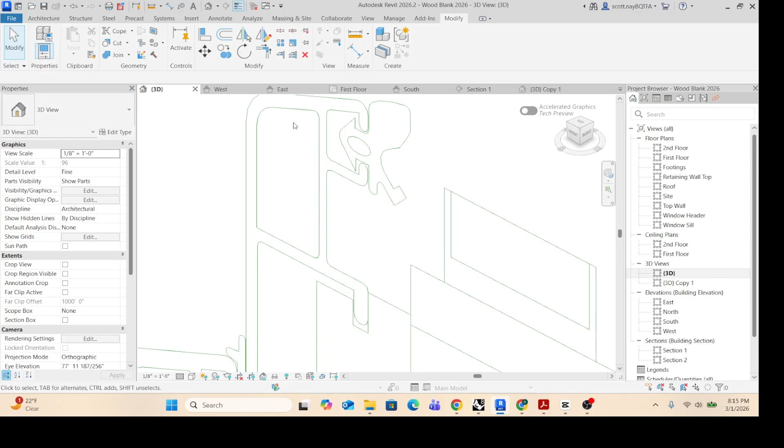So before we get into the actual how-to, this is everything I traced, and I tried to be as accurate as possible to the original, and it was extremely time consuming. I think for the larger objects, like this bit that's wood, and this bit that's wood, well, didn't quite get it all. Definitely doing the trace is something I want to see.

But once you start getting to this stuff with the aluminum, this profile is pretty time consuming, and it only gets worse from there because these objects don't even match the original because there's too many small lines that Revit can't do. So if you want to start simplifying these shapes, that's fine. I'm just showing in the video what you could do if you took the time.

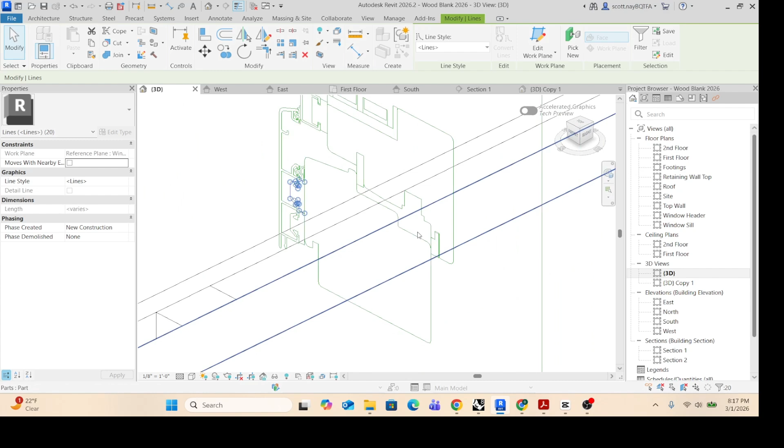And like this one here, it's not highlighting well, but that's one of the little plastic pieces you're going to end up doing. Here's another one. This is already slightly simplified here and here. So make good decisions. I simplified these again because Revit couldn't handle it, and just so you know what I'm talking about now,

I'm trying to trace all this stuff, but these lines in here, way too small. This stuff in here, definitely Revit cannot handle that. So if you want to simplify it and create a different shape that does the same thing, maybe just a little rectangle connected to a larger rectangle, that's totally fine when you get to that part.

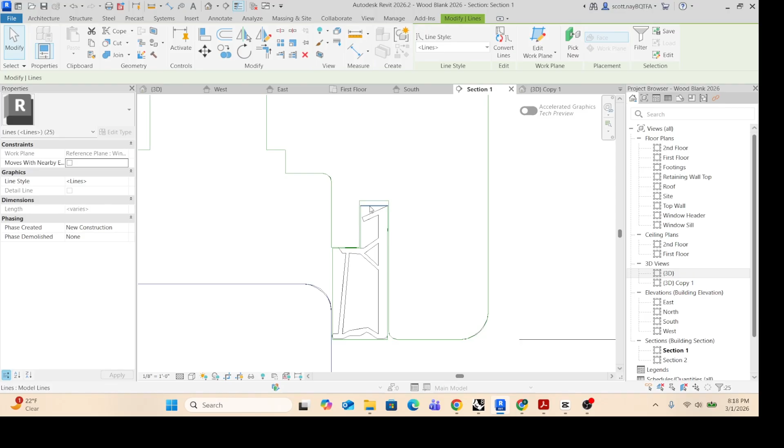Just please make sure for these main wooden elements, like this one, and well, it kind of goes all the way around, but now that I've added stuff, anytime there's double lines, it doesn't know which one you're trying to click. So these two, definitely get as accurate as you can to the drawing. But you can see this very narrow and complicated shape I've turned into this.

So, all right, that's just my disclaimer before we get into the rest of it. And now you can start seeing the actual process. All right, so we're going to try and do a window. This is the one I've downloaded and put on Canvas. It opens two different ways where this window swings in. So this is that version, and then this is just a fixed version of it. They're both on Canvas. So if you look here, there's the fixed window, there's a PDF of it.

And so all this is wood, anything with that texture. All of this with these dots inside, that's some sort of flexible sealant. Probably EPDM roofing is the closest thing we'll have. And then all this diagonal hatching is aluminum. This is our glass. We got some spacers with some more flexible sealant. And you can see on the fixed one at least, this comes underneath and attaches here.

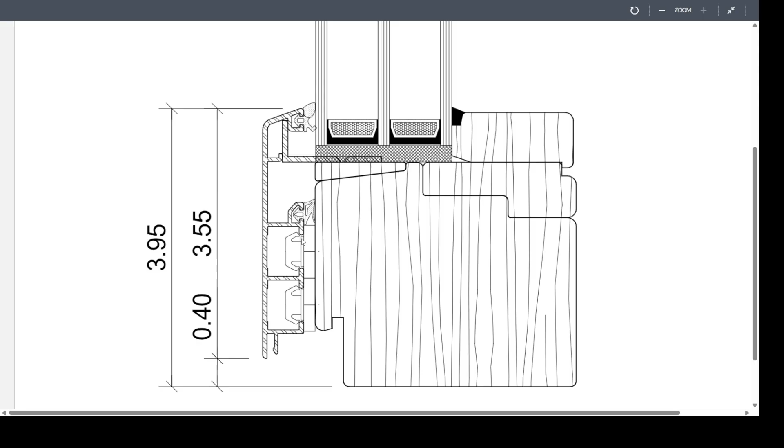These little guys are made out of plastic, and they actually attach, it's this whole thing that goes up against the face of the wood, and they just clip in. So you can see this would squeeze in as you're putting on the aluminum and then pop back out once it's in place. There is a DXF version of it if you want to import that into your Revit file. And then here's the one I'm gonna show because it's got more detail. You choose which one you want to do.

Same hatching though. You get the steel, the diagonal, these dots in here and here, here, those are all some sort of flexible thing, more plastic, wood. So download whichever one you want to do. And even within this, if you choose to end up simplifying certain things, I mean, we're going to have to because of limitations of Revit. Some of these curves and lines are just too small, and Revit won't allow you to draw them. So again, I have the PDF and I have a DXF.

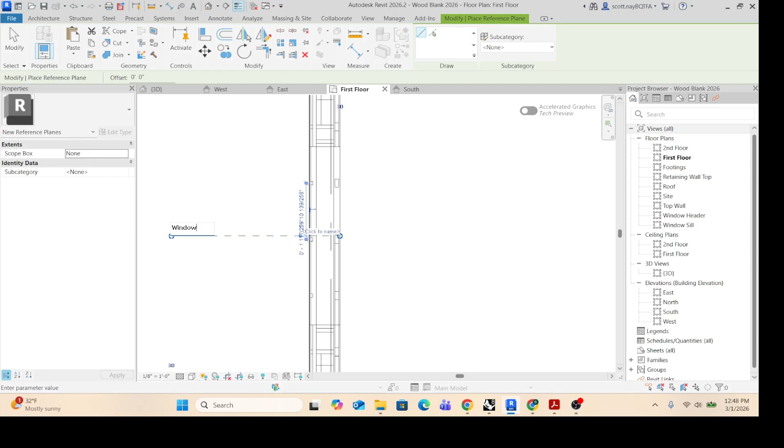So I'm going to come into Revit, and the first thing I'm going to do, I'm going to go to my first floor, and I'm going to make a reference plane. I'm going to find the midpoint of my opening here. So that says my midpoint, and if you look on the bottom left, it says it's my wall. Great. And now I'm going to call it window sweep. And just for fun, I will drag out this so it's away from my other geometry. All right, we have a reference plane to draw from.

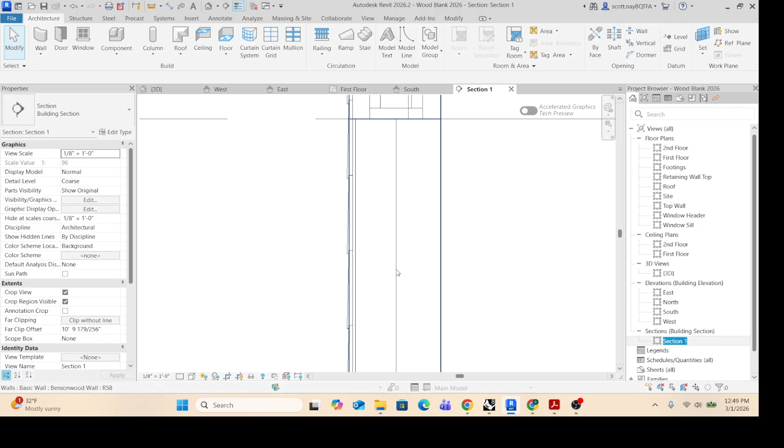Now we need a section cut. So I'm going to come up here to our top ribbon, draw a section. Parallel to that, I'm going to open it up. And so now I'm going to start hiding things I don't want to see. That was just the thing I used to cut my siding with. But, you know, the more we have here, the more crowded it will get as we're creating all these elements. So I'm going to hide that.

What is this? Structural framing. Yeah, there's a lot of structural framing beyond here. So what I might do is just come in here. I don't necessarily want to get that header.

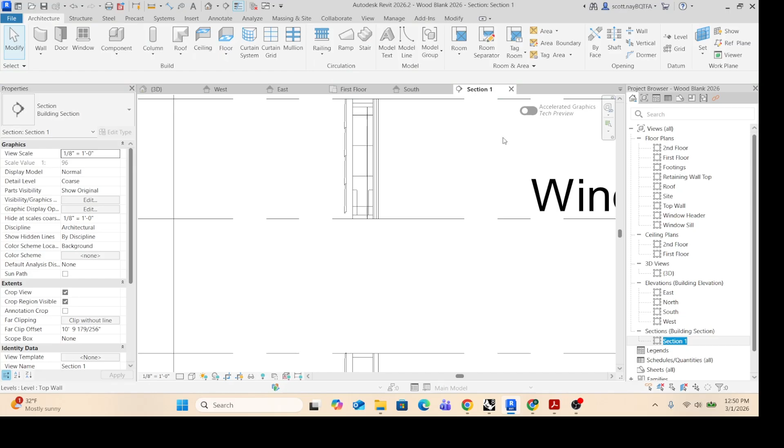All right. I'm going to hide elements and see what's left. Okay, so I still have my sill. I have my header. I'll go ahead and hide these two as well. So now I got a fairly clean view to do my profiles from.

I can come into the Insert tab, and I'm going to import a CAD. So I'm going to use the one with hatches removed because, for me at least, the more noise there is, the harder it is to make decisions. You're probably going to have this thing defaulted to some sort of auto. I'm going to say manual origin. Preserve layers, keep it at inches, and then I'm going to say open.

And here is that DXF. Just going to leave it here for now. And now I'm going to use the move tool. I'm going to get it first down onto the sill, and then I'm going to move it closer because typically your actual window is closer to the exterior. So I'm just going to kind of make a decision where I want that. That's probably a little too far because we're going on our sheathing. All right, I'm happy with that.

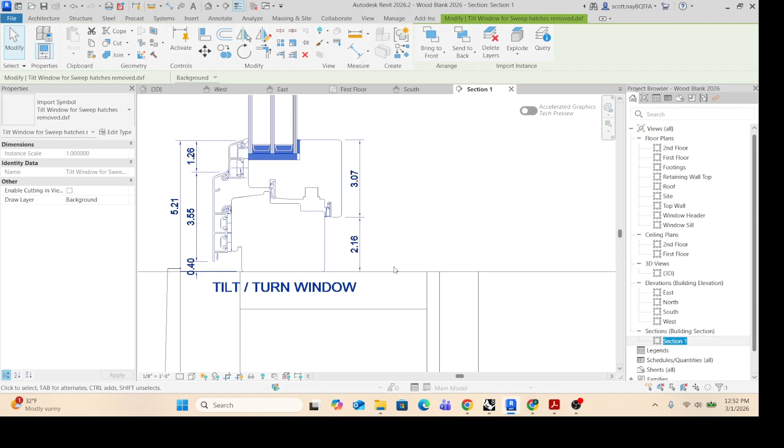And now this isn't going to sit directly on here. There's going to be some more wood underneath. So I'm just going to move it again. Now that I have it where I want it, I'm going to come up 3/4 of an inch, and that'll leave us room for some additional material.

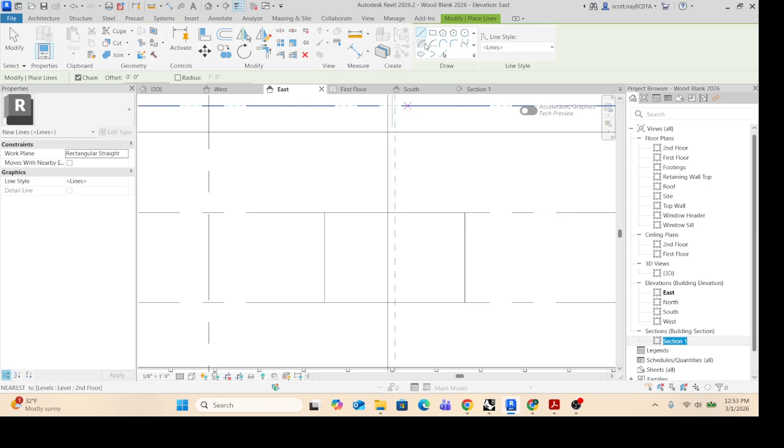All right, almost there. I need to create the boundary for when we're making our sweep. So I'm going to come into my east. I'm going to go to architecture, model line. Well, first let me see what this is. All right, I'm going to hide this. All right. And I'm going to pick my plane. So I'm going to make it the opening. And then I'll just pick the actual lines of the opening.

Great. So 3D view. I want to grab these. Again, I'm going to hit tab to get the whole chain. And my brain works better when this is a little further away. So I'm going to come back into my first floor view. I'm going to say move. And I'm just going to move them. Oh, let me unconstrain it here. I'm just going to move them like 5 feet away maybe. I don't know. Let's see what 3 feet away looks like. 5 might be overly aggressive.

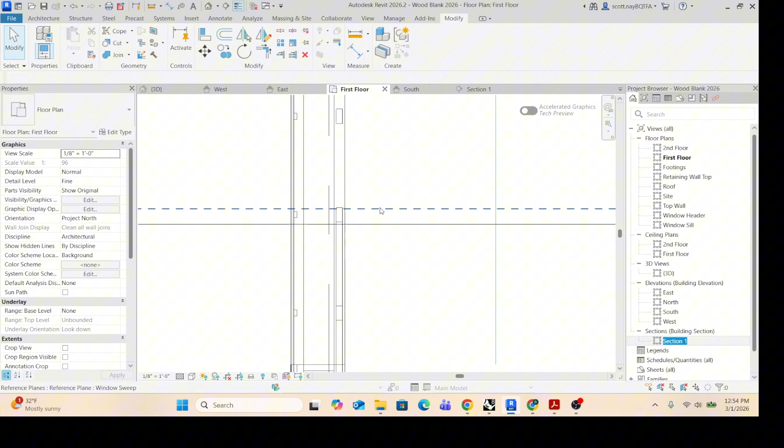Alright, so now I have something. And if I change this just a little bit, now I'll be able to choose my sweep without it being up against all my other geometry and accidentally picking the wrong thing. So I have all the important elements. I have a reference plane that I have named, really important, a section that looks at that, and then I have my model lines that follow the opening of my window that you can see here. So I'm going to go back to section 1 where I've got our outline.

The process is going to be pretty repetitive. But the good news is, as long as the elements don't touch each other and they're the same material, you can do the sweep at once. So this wood and this wood, I can do those both at once because there's no overlapping lines or touching lines. If you take the time to separate this out as EPDM and this is aluminum and this is aluminum, you can do the 2 aluminum pieces at the same time. And then you could do 1, 2, 3, 4, 5 pieces of EPDM all at once because none of them touch each other. All these plastic pieces you could do at once. And we'll get to this in a bit.

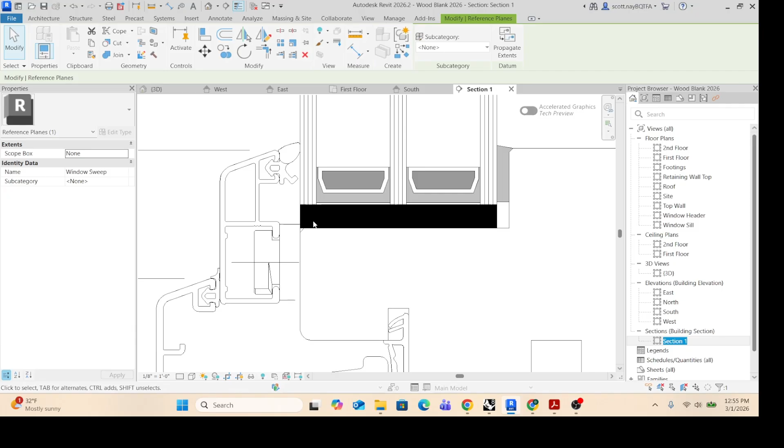If you look at the actual pictures, this is far more complex than we're going to be able to put together in Revit. So one of the downsides of Revit, or the limitations I should say, is you cannot draw a line less than 1/32 of an inch. And I have tried multiple suggestions on how to fix that, changing scale, drawing it large and scaling it down. And the only one I haven't tried yet is creating a custom family because that's kind of beyond what this class is about. So I'm going to start with the wood ones because they're the largest and the easiest.

I'm going to go to architecture, model line. I'm going to set my reference to the window sweep. I'm going to start just by using pick line and getting all the major ones.

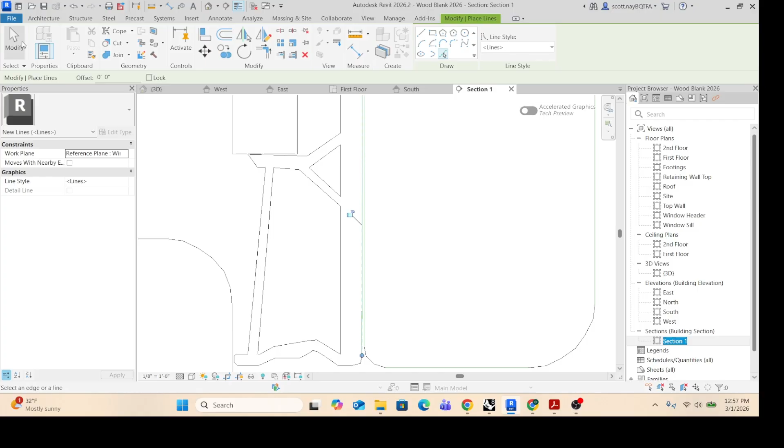Okay, let me undo that. I grabbed the wrong one on accident. So if I click that, no, okay. So be careful which one you're picking. Alright, so now I'm back to that. I don't need to, it's still on the correct reference plane. So even if you have to edit something, don't worry about it. It's a pretty easy fix.

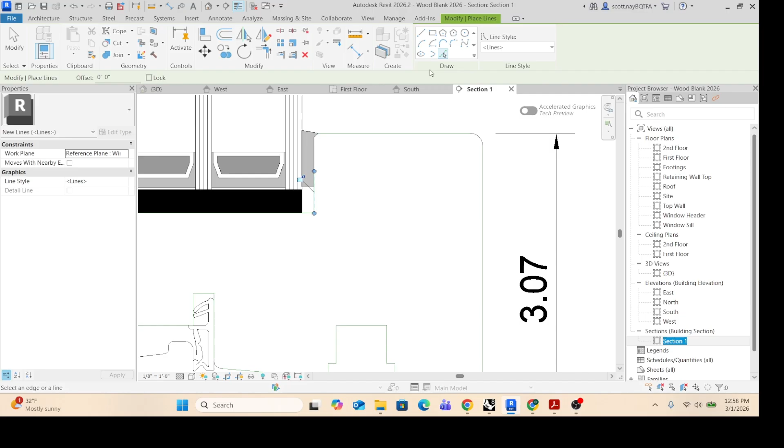And I'm going to come back after I've got all these straight lines and do my curves. And this one's not the one I want, so I can either come up here or I can click tab. Alright, now I'm going to switch to fillet, and even with this one that's super short, it'll still work. And I'm just eyeballing based on the drawing here. I'm not going to be typing anything in like we did with that zinc roof, because each curve is a little bit unique.

So that's a straight. Here we got another curve. And you can see if it gets too small, it's just like drawing a line less than 1/32 of an inch. It will let you know. And so now we got this one. And I don't think these are actually connected. I think I've got all my other curves, so I'm just going to use trim because I don't think they actually did.

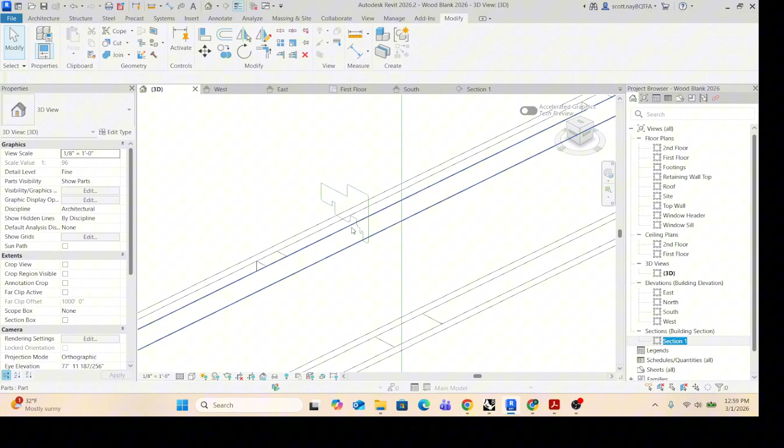Alright, and so now if I want to see, did I get this all, rather than hiding my image, if I just come to 3D, I can see, yeah, I've got a complete, and I'll know it's complete because if I hover over one and click tab, it'll give me the whole chain. All right, that's one profile down. I'm not going to bother doing the sweep yet because, like I said, as long as it's the same material and they're not touching, you can do them all at once.

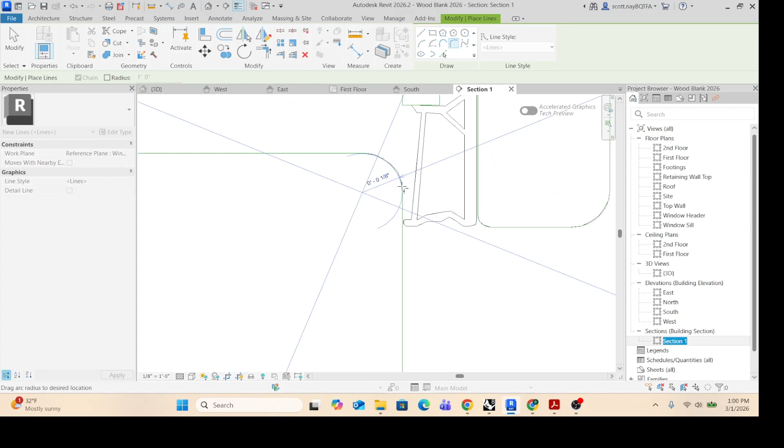So I'm going to come back in here, go back to architecture, model line, same process. I'm just going to pick all of the verticals and horizontals to start, and I'll deal with fillets after the fact. This one's a lot more basic. So there is a lot of tedium in this.

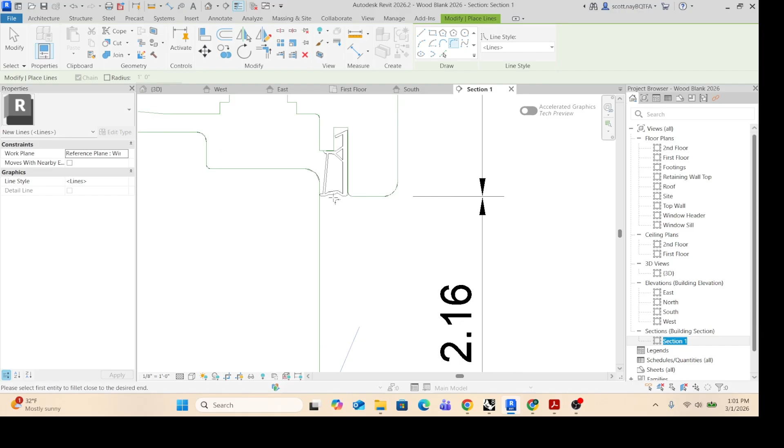Okay, I'm pretty sure I got all that, but again, I'm going to come to my 3D and let that be my deciding factor rather than hiding and unhiding. And then I'll click tab. Yep, okay, I have two successful sweeps, or sweep profiles, I should say. And so now, since I drew these on the bottom, the first path I want to pick is this one when I do our sweep.

So I'm going to come into architecture, component, model in place. This is going to be window. This is going to be a sweep. I'm going to pick the path. I'm going to start down here. I'm going to say OK. Now I'm going to edit the profile.

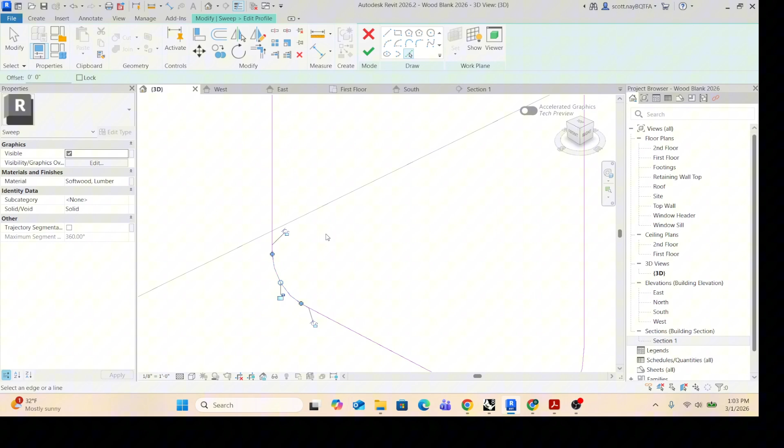I'm going to say pick lines. I'm going to do the tab. Tab. Oh. And you don't actually have to hold shift when you're doing it. Oh, what's it stuck on now? Unfortunately, I didn't grab these first go around, and if I tried doing the whole thing again, it would give me error messages, so I have to go one by one. All right, so I've got both of them.

Great, this is already softwood lumber, so I don't need to change my material yet. I'm going to click OK that I'm done. I'm going to click OK, and now we have our window. And if I come here, this is what it looks like. If you want to use a different wood, you can see on the manufacturer's website that pine is one of the options, but they do use other woods. Totally up to you. All right, so I've got that. Let's come back into our section cut.

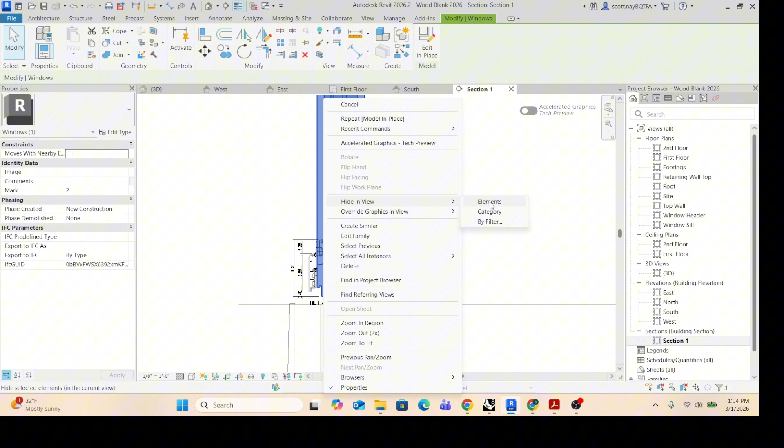And so now I got all this. I'm just gonna hide that for now, because again, I want to be able to see cleanly. So what am I going to do next? I'm going to do some of these aluminum ones. And this type of detail is absolutely not going to work in Revit. These connections are too small.

I'll just show you what happens if I go model, pick line, and I pick one of these little ones. You see it says can't create line. I've even tried doing this at a much larger scale and then scaling it down, and all it does is delete all these tiny little lines and you have to recreate them. So I'm going to use pick line. I'm going to pick my significant ones that I know are going to work, and then make some executive decisions as to how I want to connect those.

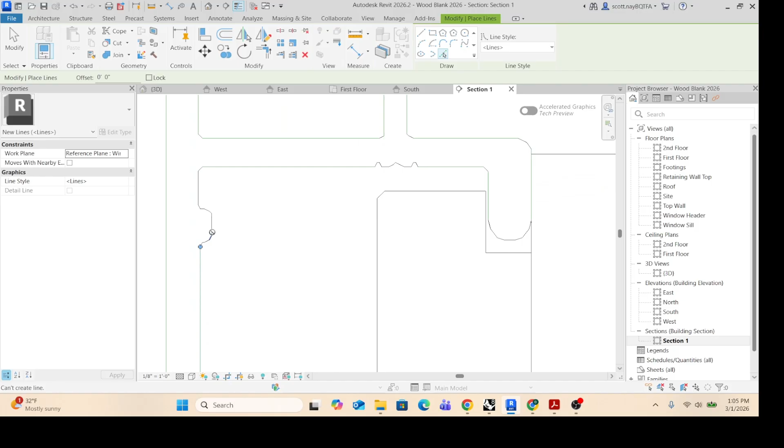And even this, you can see it won't do it. So I'm going to leave these out because even if I did this in a diagonal, it wouldn't be happy. So there's a reason most manufacturers have these as a separate drawing from their actual Revit components, because they know Revit can't handle this.

All right, I am gonna make some decisions here. I'm gonna start in this view and just go with some fillets because I know I can do that. And once I get, yeah, there we go, I can get that much at least. And I don't know that this is going to let me do it. We'll see. Yeah, as soon as I get there, it stops.

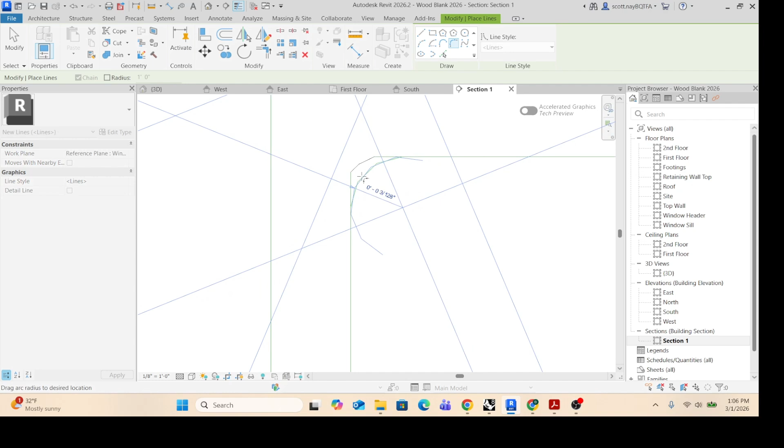So if you just want to connect these using trim, that is a choice. I'm going to try and get this as close as I can. So for this, I'll finish with my fillets first. And even though these are really far away, I can still use fillet. And it looks like 256 is what it's letting me do for a lot of these.

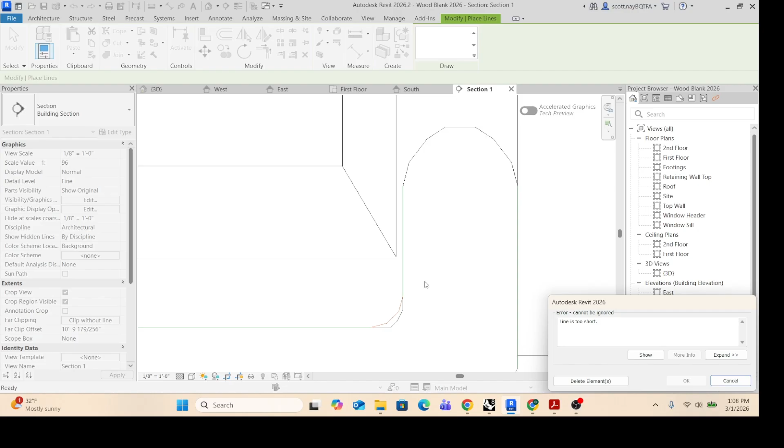But not this one. So same arc, but you can see line is too short. I'm going to have to say model line again, fillet. So now technically it's the same, but I'm not getting that error message. I know this is super exciting.

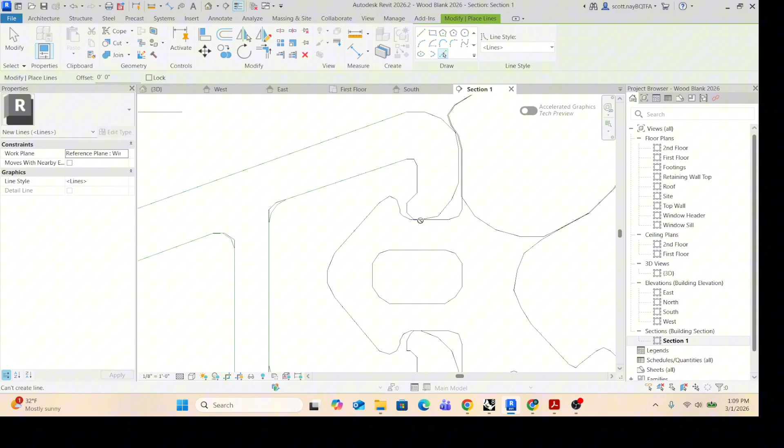Alright, I've got that. I've got to figure out what I'm going to do here. I think what I'm going to do is go back to pick line and I'll get this tiny, yeah, so it's not even going to let me snap on that one. But what I'm going to do is I'm just going to draw a line in that area.

And now I'll try fillet. Yeah, line is too short. So instead on this one, I'm going to cull it and just use trim to connect those. And then I should bring this down further. It's either that or I'm going to actually try and just draw another model line over here. It ends at the same depth.

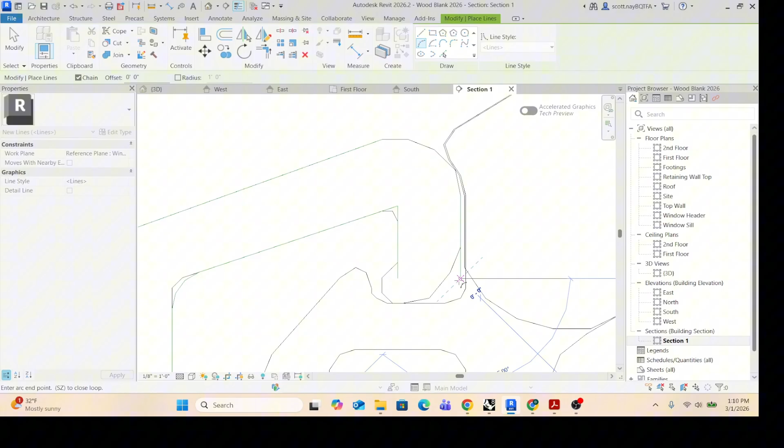And now let's see. Nope, that's too far. So I'm going to drag that up to here maybe. And now I'm going to try that again. Right. Not going to be perfect, but that is a limitation that you would not run into in something like SolidWorks or Rhino.

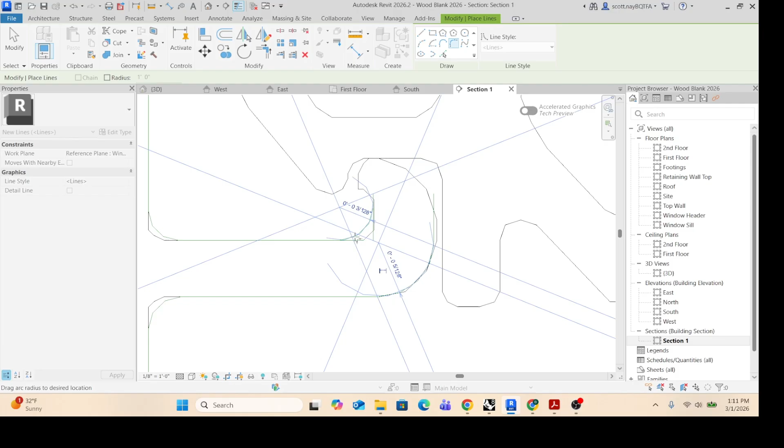So I need to do something similar down here. I'm going to just draw a vertical line. Turn off chain here so I can create another. Alright. So first I'll try filleting this corner. Yeah, that's fine. That's a little too much, so I'm just going to start here first. Okay. And now I'll trim this.

Is this fully enclosed? No, I still have a lot of gaps here. I'll probably just use trim on this one. What do I have here? That's done. Got this. Oh, I need another cap here. So I'm going to try our good old start end radius. What am I missing? I'm missing this one.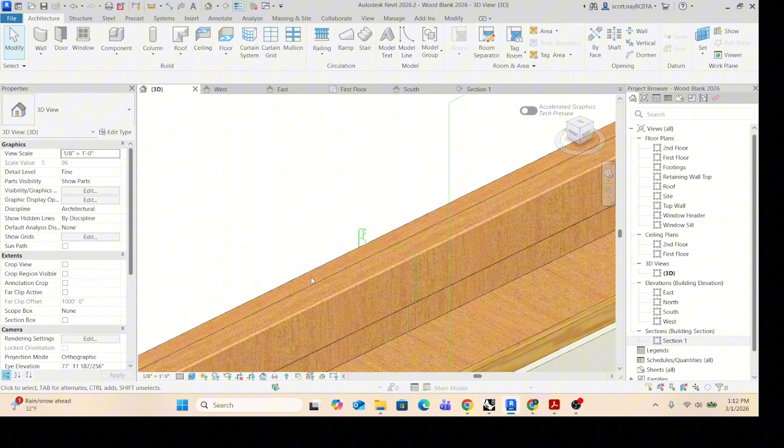And if you're not sure, just come back into the 3D view. And I'm gonna hide that for a minute. So I think, aha, I've got one here that's not connected. So that's a chain of walls. Or chain of lines, I should say. Alright, so I can do that shape now.

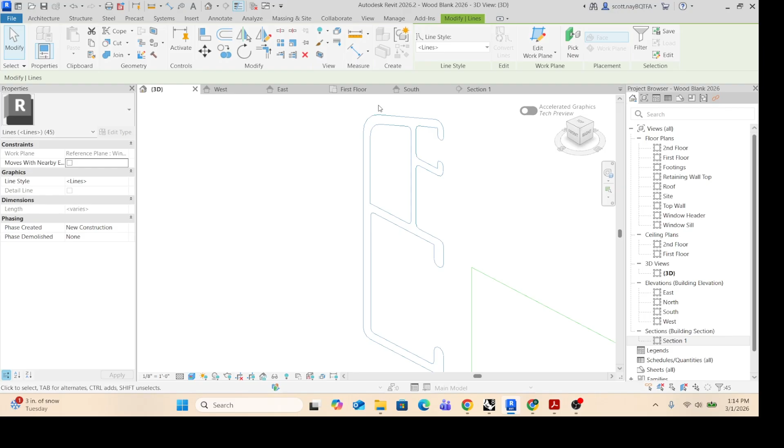We've got to do it again for the other one. Since they're both aluminum and they don't touch, I don't want to have to do more sweeps than I need to. If you want to do one at a time, your workflow is your workflow. If you want to simplify this even more than I did, that's another option. I do suggest keeping your butyl separate though. Even if you don't get all these fillets in there and you keep more just trim connections and angular, you really probably want that separate.

Alright, back to my section view. And so now I'm going to do the same thing down here. It's going to be tedious. I will be silent for a lot of it.

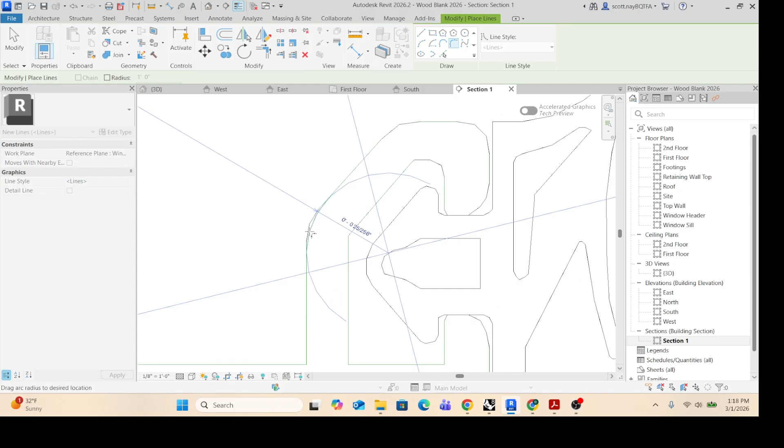So now we got some weirdness. Yeah, I might end up just making this more of a straight line connection. What the? Okay. Oh, that's why.

I'm just going to trim these, make life easier. While I'm in trim mode, I'll go ahead and come back up here. Don't think I have a horizontal here yet. Oh, I missed that. Okay.

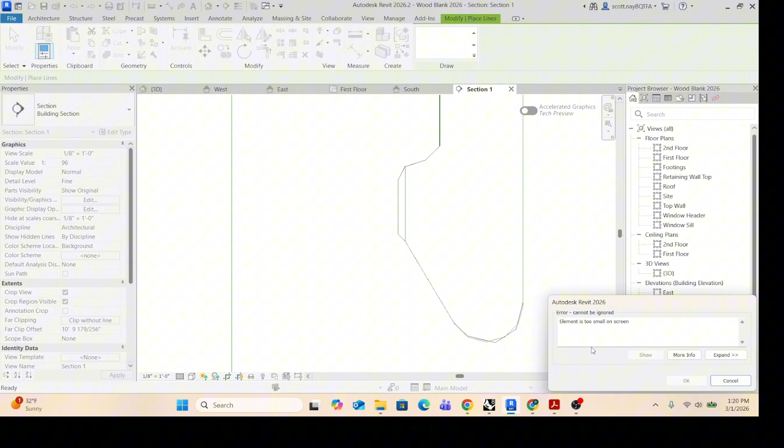I'll bring that up in the hopes that the line will now be long enough. There we go. Nope, it's still giving me the error message. What do I need? I need it to be at least out here, apparently. So that's the smallest line you can make, 1/32 of an inch. So now that I know that, I will delete this, and we'll see if it lets me use trim. Yep.

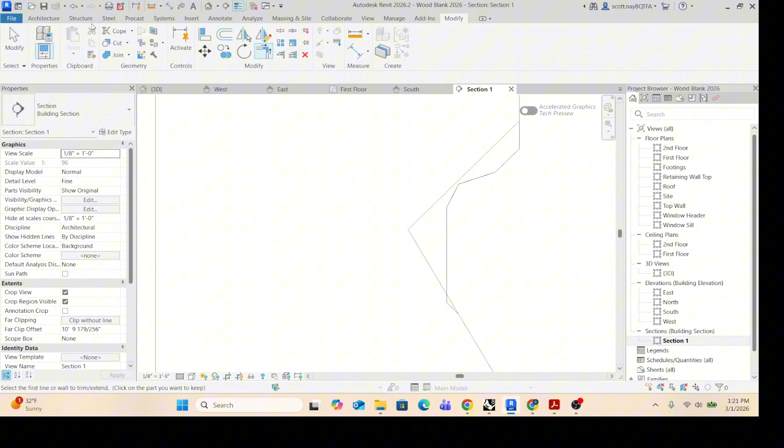So now that we've trimmed them, let's see what we can do. And again, line is too short. But I can drag this up. I can use trim. So I'm just going to draw a diagonal line here to start, and then we'll see what it lets me do otherwise.

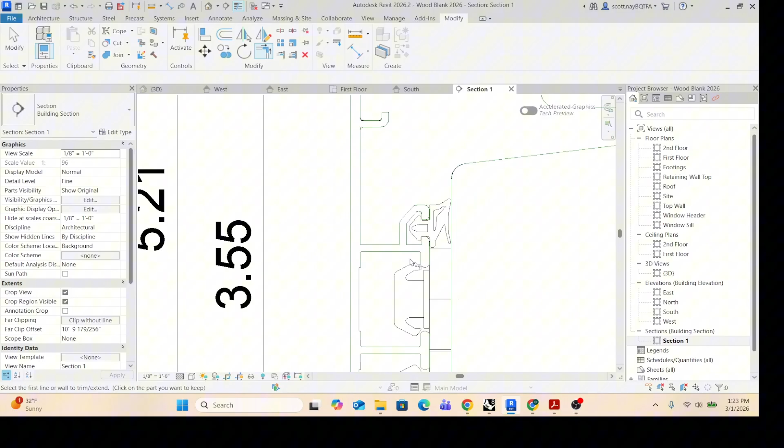Instead, I'm gonna just come in and use our good friend start and radius arc. Just make it look like that. I do need to trim these to each other. Alright, I still have this mess to clean up, I think. And the top one, or did I already get this one? Yeah, I made it just random flatness.

I'm going to do the same here. I'm going to make a model line. I'm just going to come across, use trim, and then try and do some sort of fillet. I'm going to come back to start and radius arc.

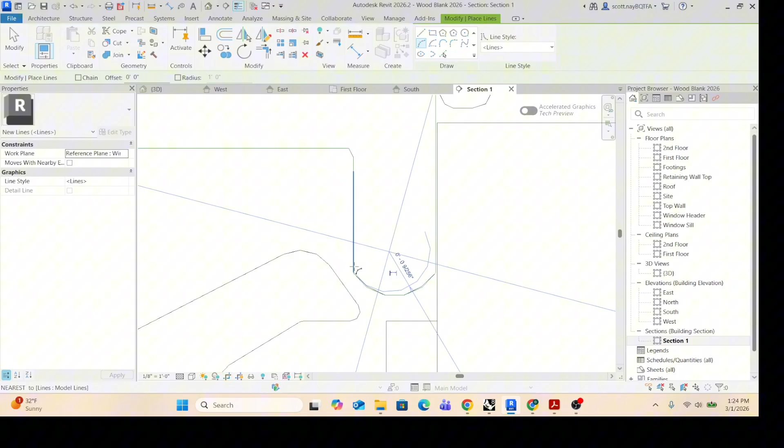Alright, and now let me check 3D again to see how much of this is complete. Alright, so I've got this lower bit, and I've got this upper bit. I thought I trimmed those. Let me just do it from here. Huh. And the nice thing is, since these are already on a set plane, I can do this kind of thing and not worry about where they're going.

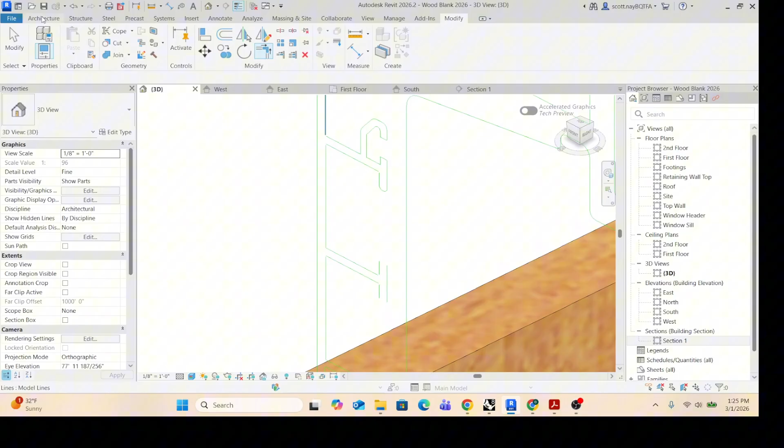Not sure why that's not closed off. But yeah, once you get down to the nitty-gritty stuff, as long, oh, now this is switched to parts. I gotta set it back to window sweep. Close that. Close this. So really it's just this bit up here.

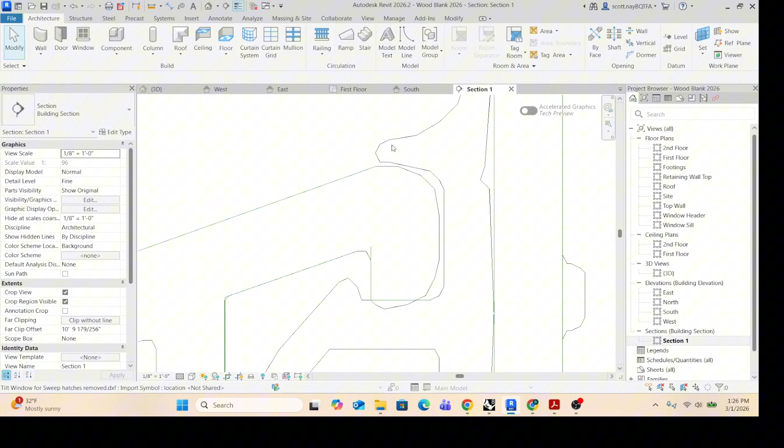So I'm going to go back into section 1 and make some decisions. I already have a line there. No. Okay. Now let me see, at least this top bit, if it'll let me, and then maybe even here, although I'm probably going to get an error message. Yep. So for this, I'm just going to go back to trim.

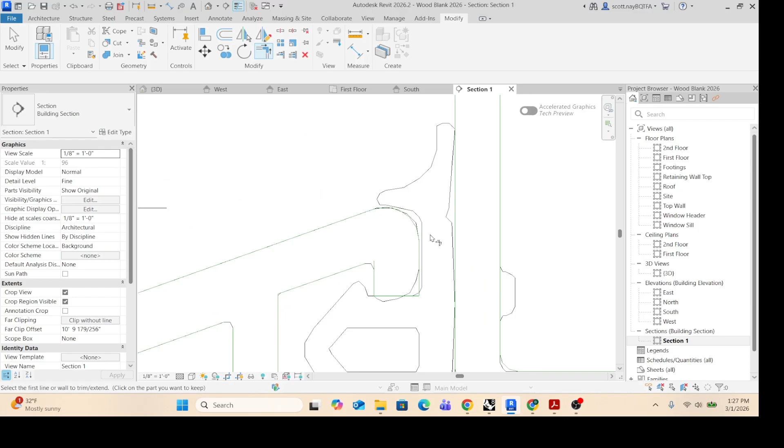Okay. I think that's it. And I'm wrong. Alright, bottom bit. So I'm going to try first drawing a model line. And now I'm going to see about this outside fillet. Okay, we're good. No, we're not good. I'm going to try one more time. All right.

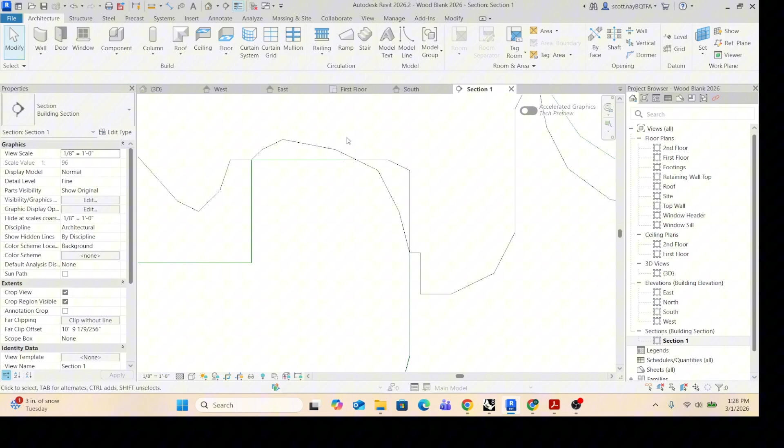All right, if I can get that a little better. And now that's too short. All right, trim it is. Triple check. Now the real test. Aha. We switch to something a little easier to see. There we go.

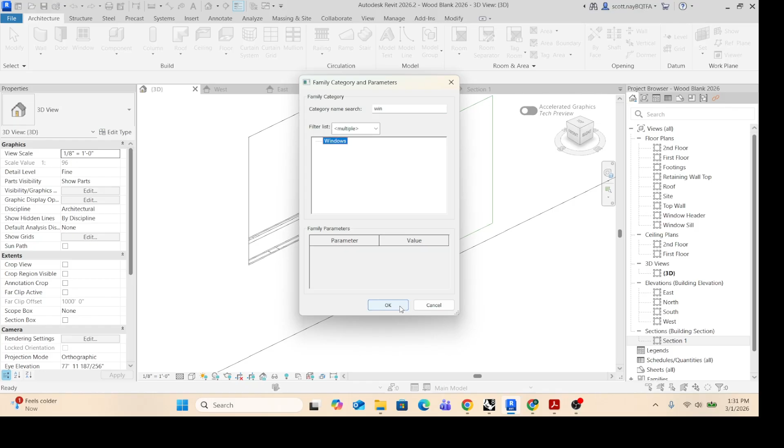So I'm going to do it from here. I'm going to say architecture, component, model in place. It's going to be a window again. It's going to be a sweep. I'm going to pick my path starting at the bottom. Click OK. Now I'm going to add a profile. I'm going to click Tab.

Oh, wait, pick line. Tab. And you don't have to hold Control when you're picking lines. You just need to keep adding to your selection. All right, that should be everything. Now I want to switch from softwood lumber. Make sure it's aluminum.

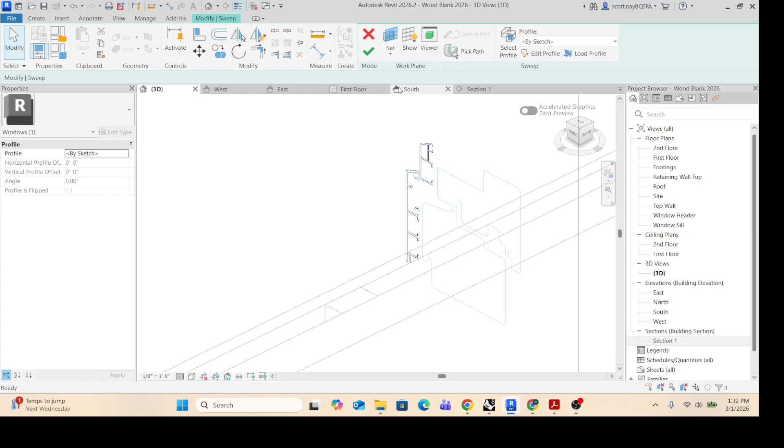Click OK. Click OK. Finish my model. So let me open a new 3D. Let me just duplicate it, but without detailing. Oh, well, that didn't do me much good.

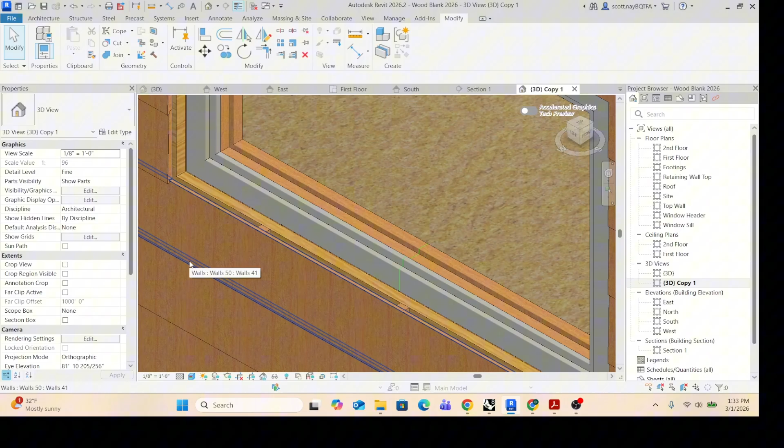Back to realistic for a minute. And so now here we get this wood inside, we get this aluminum on the outside. If I come over to the front, you'll see what we've got. All right, next thing we're gonna do is all that rubber stuff that separates. So I'm gonna save you all the tracing and come back when that's done.

All right, I know I said I would come back when all the profiles were done, but because we have some recurring shapes here, it took me a minute to draw this one. I don't want to have to redo it all. So what I'm going to do is hold Control to get this whole shape outline I made. I'm going to say copy.

I'm just going to come right down to this next one in the hopes. And now I'm going to say move, because I want to move it around. It's not going to fit perfectly. Let me do this again. And I'm going to use my keyboard just to kind of get it roughly where I want it.

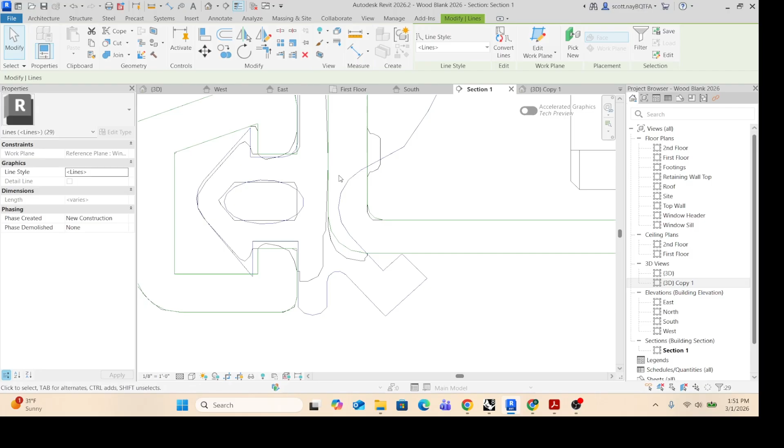Now that I've done that, I can just delete these extra bits and draw less of it. So I wanted to show that on video just to make your life a little easier. But again, I don't want to bore you with every single tracing I'm doing. So I'm going to pause again for a little bit.

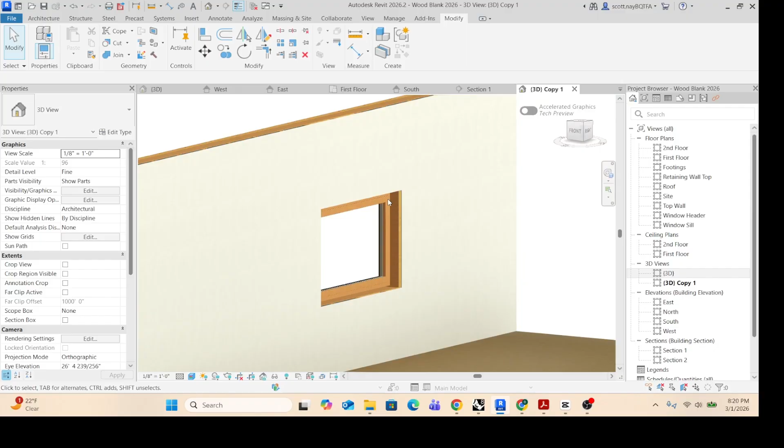So you can see from some of these profiles, the limitations of Revit are really making it not line up. You can see here we've got all of our window stuff. We've got our wood, we've got our rubberized stuff, we've got our aluminum. All of it's been following the exact same sweep path. And I think if I go to my section, even these clips made out of plastic, I've done those as well.

So we're still missing a couple things though, right? So this is kind of floating in the middle of the air. And we have space up here as well. And we don't have any glass. So these are going to be a little funkier. We're going to do the glass as just a regular component model in place.

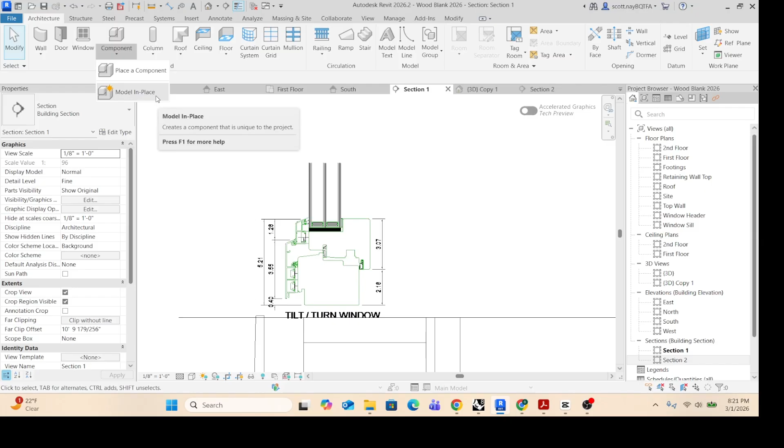So I'm going to come in here. I'm going to start with that. And I'm going to say architecture, component, model in place. And we're not going to do a sweep. It's going to be a regular extrusion. So hopefully it's on Window Sweep still, because that's where we want to draw it. And I'm going to switch this to glass while I'm thinking about it.

And now it's essentially these bits here. I'm going to start with pick line. And there's no short line here. Oh, I guess there is. I hit tab enough times and found it. Alright, so I've got these three. Now I'm going to switch. I made a section 2 just so I could see. I was hiding everything in section 1 so that it was clean. And now I have a section 2 where everything actually still exists.

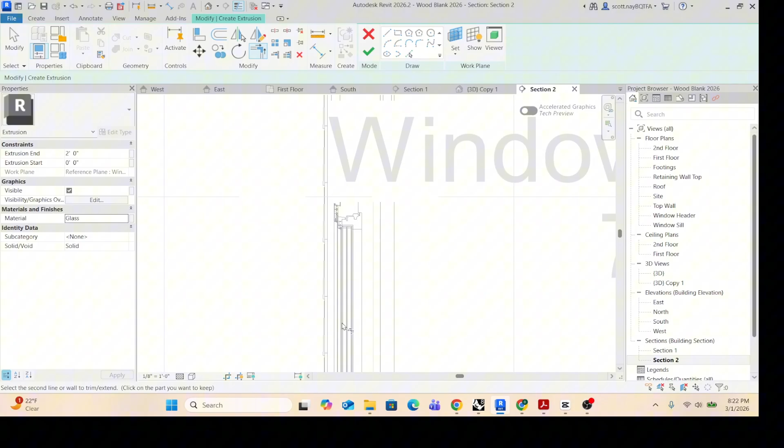So now I'm just going to come up here knowing that it comes up to this bit. And there is no short line this time, so I'll draw one. And now I'll use my trim. Trim this also up here. And the reason I know this is where it lands is that this is the upside down of what's below. This is the spacer. This is the rubberized thing that keeps the glass from hitting any metal.

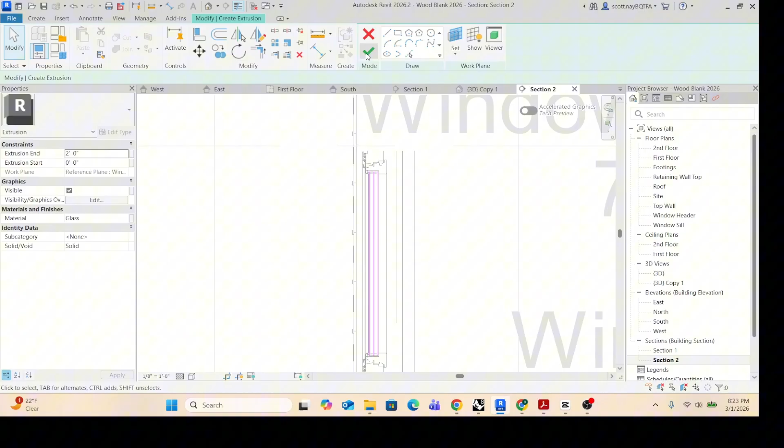I'm going to do all three at once. I'm going to click tab, get all 4 lines. I'm going to say copy. And the nice part about this DWG or DXF, whichever one it was, is I have real lines to snap to already rather than guessing on a PDF and maybe having something misaligned. Alright, so I've got this, it's glass, I'm going to hit OK. And now I'm just going to come into my west.

And let's see. Oh, not my west. Let's try my east. There we go. My east has all my window bits and bobs. And so I'm trying to make it roughly the same overlap as the others. And it'll probably snap. There you go. So now I can say finish. That's our glass.

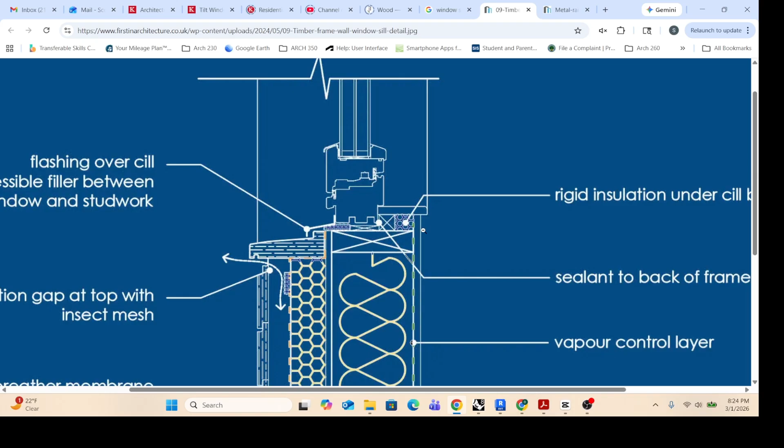If you look at a header, let me switch to a header real quick, or sill, sorry. You can see all this regular window stuff sits on top of even more things. And if you Google search this, you're going to see a bunch of different ones, but what they're going to have in common is an angle to let rain come away, some sort of interior trim to come to or past your drywall or plaster. And then if you look at the top, you don't have that angling.

So we're going to do something funky with sweep. We're going to do the sides and top separate from the bottom piece. So I'm going to come back in here. I'm going to go to my section 1. Actually, I'm going to go to my section 2 to draw it, because now I can see the shape. I want to make sure I'm on fine detail.

First I want to look for anything hidden. That's fine. Looks like I'm not hiding anything, but these are kind of in my way. So I'm going to hide that category just so that I can see more easily. So this is the edge of my drywall. The question is, do I want to come out a little? Do I want to have it rest there? But I need to come from here.

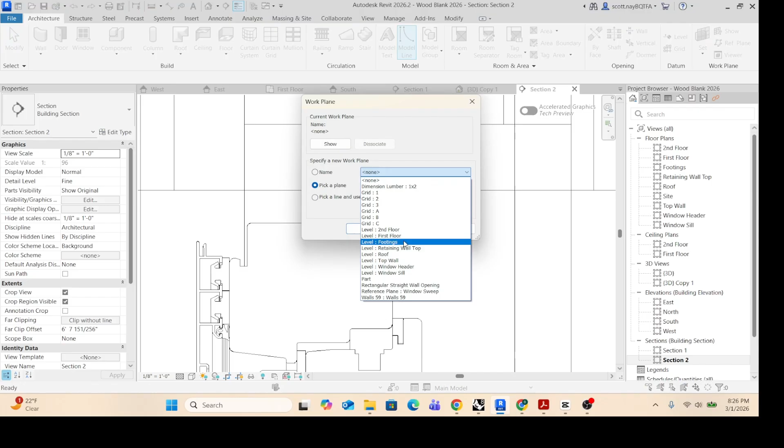So I'm going to go architecture, model line. I'm going to pick that window sweep again. I don't have to be on that one view to do it. I'm going to pick this top line to start. And then I'm going to draw this line. I'm going to come from, well, I'll start here for now. And now I'm coming here. And I'm just going to leave it. Yeah, it keeps giving me that. That's fine. And I'll use trim in the other view.

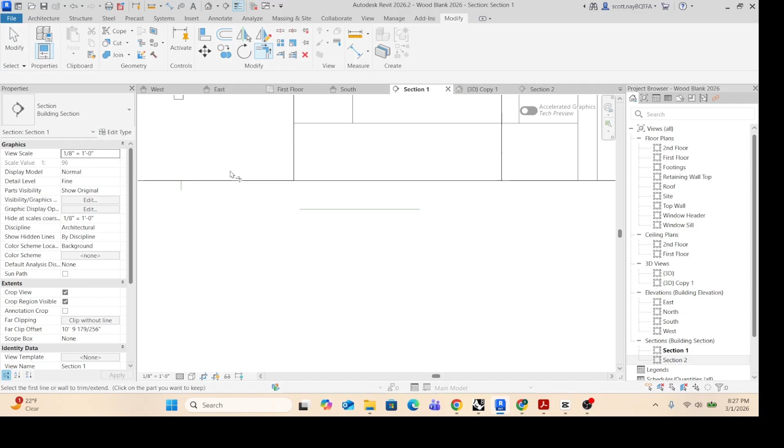All right, so now if I come back to section 1, I should see most of it. I'm going to come to modify, trim. And in this view, we are missing some important stuff. So I'm going to unhide a few things. Right now, my bulb isn't showing up, but I can just hold R and H at the same time. And anything that's hidden will reappear. So I'm going to unhide this. I'm going to unhide this part. Okay, I guess I'll unhide the whole category.

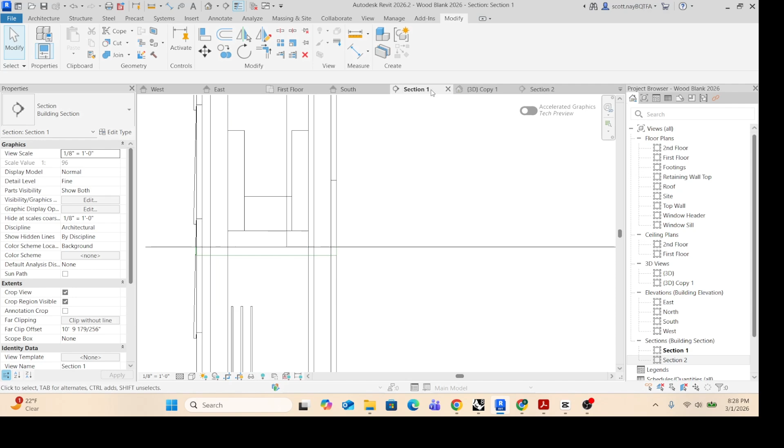So now if I do want to extend, and I probably do want to come past, nah, it's cut to there anyway. But on the inside, if you want to have a little lip, now's the time to decide how much. And I'm going to leave it for now. So I'm going to come back into my 3D. It's a little hard to see, but I can grab it from here. I'm going to say architecture, component, model in place. It's going to be another window. It's going to be a sweep.

I'm going to pick my path, and this time, since my model lines are up here, I'm going to start with the top. And then I'll pick these two. I'm going to leave the bottom alone because that one's got a different profile. I'll click OK. I'll say Edit Profile, and if I say Pick Lines and click Tab, now I have the entire shape. Make it out of sash or softwood, your choice. I'm going with sash. Click OK. And now I can finish it.

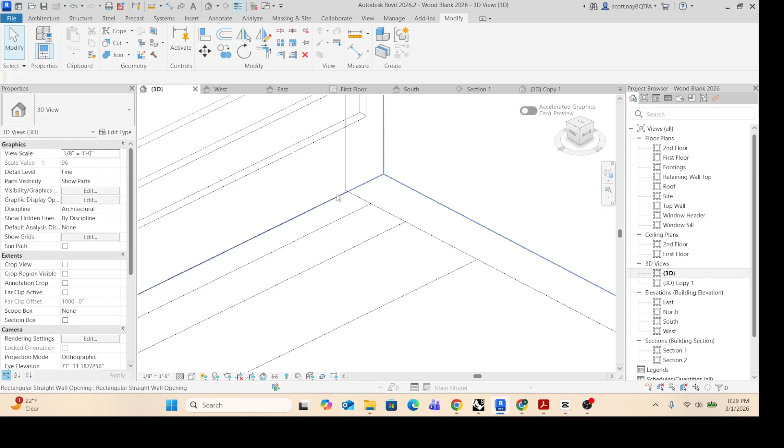Alright, so that gets me down to our base here. It covers my drywall. It goes out past where our clapboard will be. Now we want to think about this. And if I do this full sweep here, what will happen is it will cut into this. So I want to do a brand new model line in between. So I'm going to come to my east.

I'm going to say architecture, model line. And right now it's set to my wall opening, which is perfect. If yours isn't, you probably have to go to pick and then find your wall opening you made. So I'm going to leave mine. I'm going to draw a line, and this time it's going to be inside that sweep we just did, but along the bottom.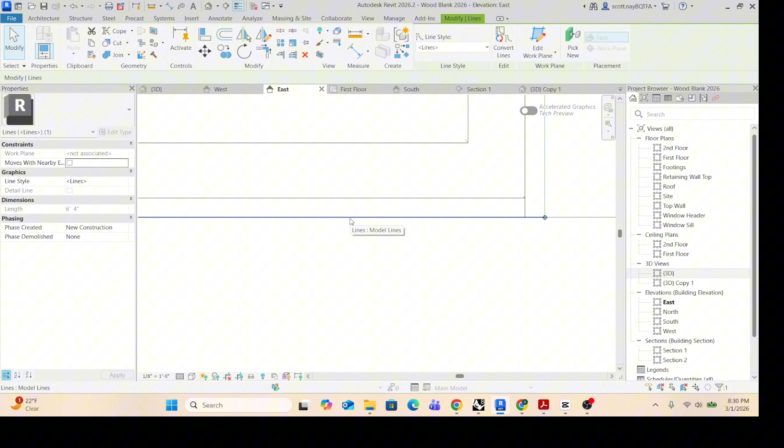And you can see there's already a model line. It wants to do all sorts of stuff. So now I've highlighted just the one I drew. I'm going to come to my level 1 and hope that it's still highlighted. First floor. Yes, it is.

I'm going to say move. And I'm going to unconstrain it and just come out. This time I'll come out 2 feet, so I'm not right up on top of this one. So now for my 3D, I have this one for the full sweep, and I have this one which I'm going to use for this bottom bit, but I'll also use it for my flashing.

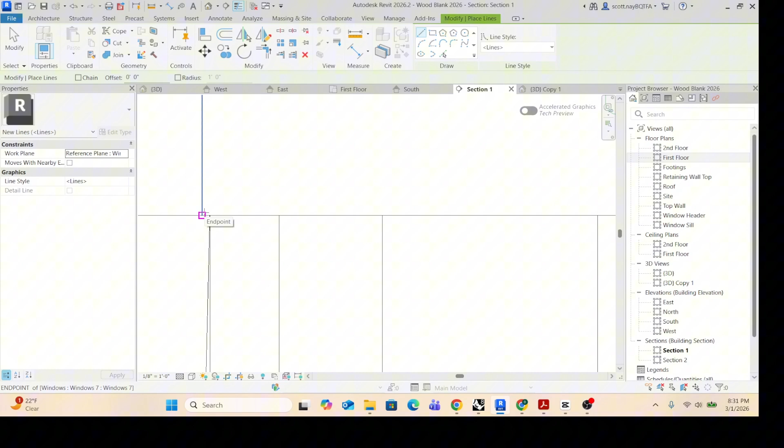So I'm going to come into section 1, and I'm going to start drawing a shape here. I'm going to say architecture, model line, I'm going to come all the way to the edge, and I don't have chain on. That's okay. I know it's 3/4 of an inch.

And then when I get just past here, I'm going to click, because what I want is an angle, like we saw in that picture. Something that slopes down. And I'm just going to pick, this is 6 degrees. Yeah, 5, 6 degrees. Something that really makes sure water's going to head this direction.

And I'm going to find that end I drew, which apparently is right here. I'm going to come up a tiny bit and use trim. Alright, this is my new profile. It's got this drainage. It could come out even further. Let's go ahead and do that. Yeah. And now I'll use trim again.

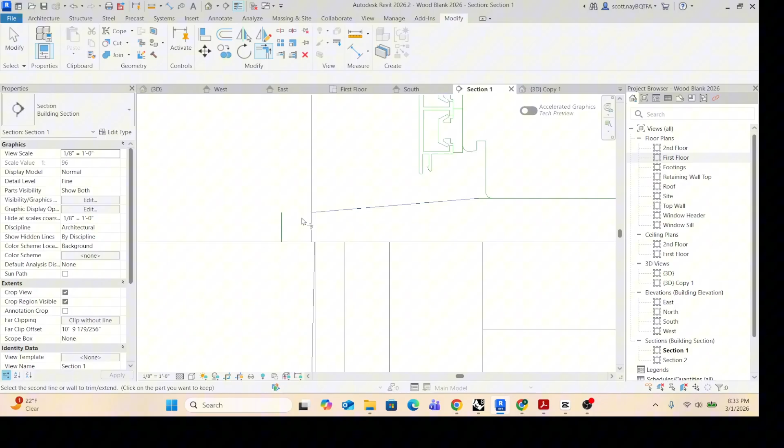And now we've got a little more room to keep water out of our siding. So I'll come back into my 3D view. I can see it there, it looks fine. Architecture, component, model in place, still a window.

It's going to be another sweep, even though it's just the one. I'm going to pick my path, make it this. Now I'm going to edit my profile. Come into pick lines. I'm just going to click tab. Get that whole shape. I still want it to be sash. Alright.

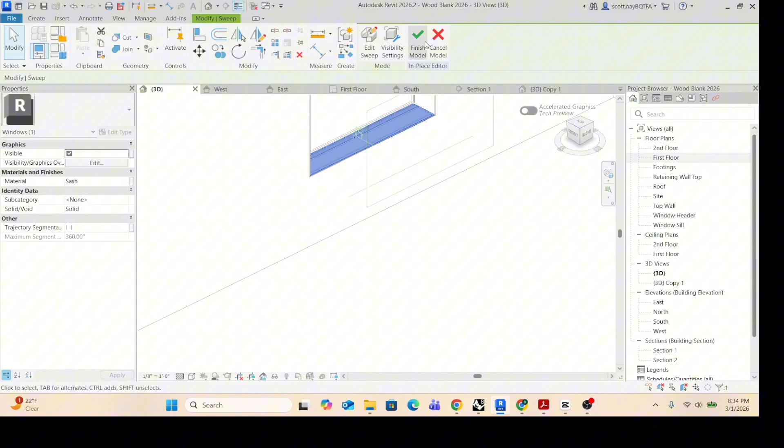And so now you can see that ends here instead of cutting through. Let me switch to realistic just so you can, or actually I think I have 3, yeah. So now this is what we got, right? We got some actual glass. Got lots of aluminum and rubberized stuff, wood. We need to think about moisture.

So the last thing I'm going to do before we finish with this window and move on to roofing is the flashing. So I'm going to try and start mine up here and then come down over past. And I'll give it something like 1/8 of an inch offset. So I'm going to come to architecture, model line. I'm going to start by picking this line. I'll pick this line.

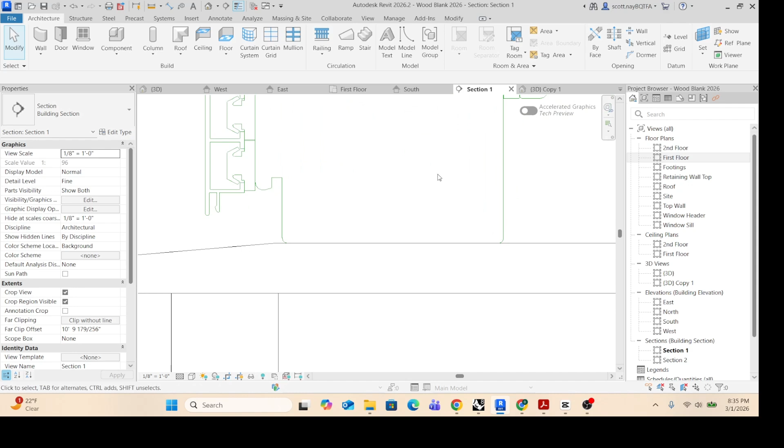Model line. Here, I'm just going to draw because it's not cooperating. Actually, let me see. There we go. So I'm going to come out past. And then down past. Again. My mouse is freaking out on me.

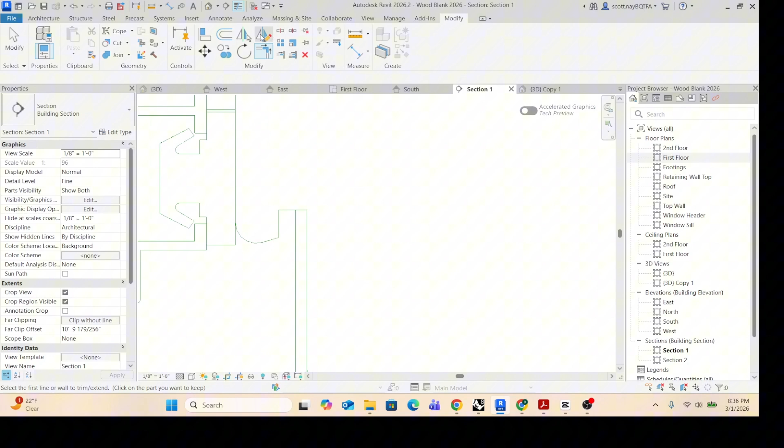Now I'm going to use pick line with an offset of 1/8 of an inch. That might be a little big in here. Let's go with 1/16. Flashing is not massive. I'm going to use some trim. I'm going to close this top up with a short line.

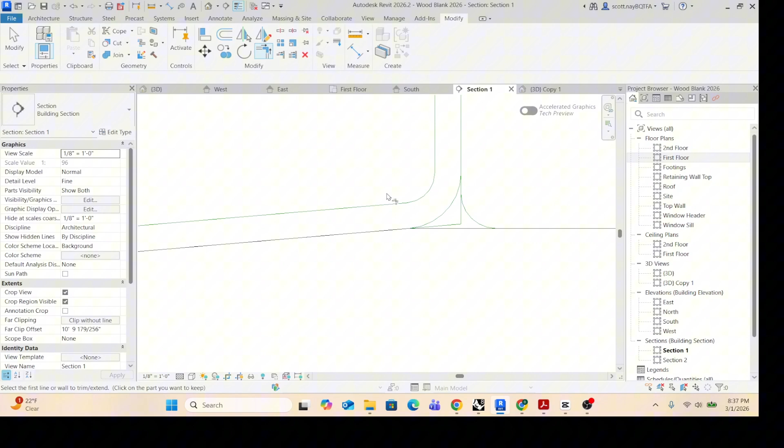So let me actually just go back to pick line. 1/16. Alright, now I'll trim here to here, here to here. I got my shape. Now I can do our last bit. Go back to 3D.

Component, model in place. I'm going to call it Windows. I'm going to make it a sweep. Pick path. Again, I want the short one. I don't want it cutting in to our other stuff. And edit profile. I say pick line, click tab.

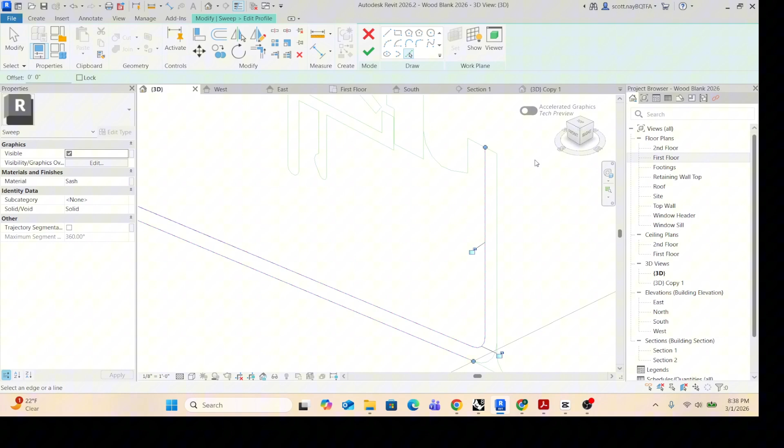Right, did that get everything? Is it closed? No. So I'm going to have to manually come in and add these. Alright, now we got our shape. We definitely don't want this to be sash. Come back to aluminum. Click OK. Click OK. Finish the model.

And so now we come around this side. You can see we got a nice drip edge here. We got all the aluminum on the outside except for this bit. Suppose you could have made this vinyl or aluminum if you liked. I'm going to leave it like this though. And that is it for practicing our sweep and using this window as an excuse.